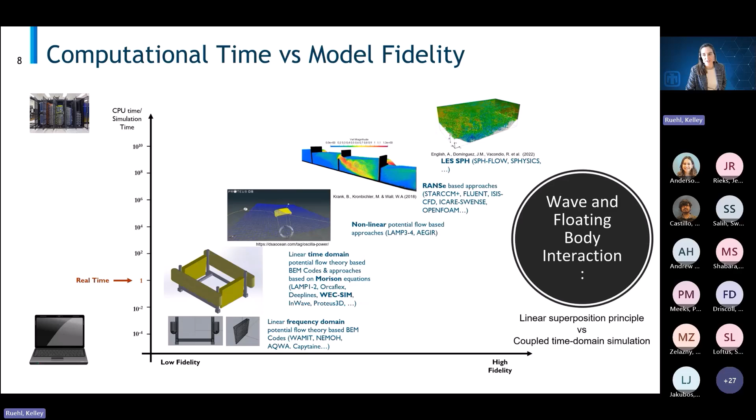So we can run things quickly. You can add some nonlinearities in, and Mohamed will talk a little bit about some of the nonlinear features and how they compare to some higher order models later in the talk.

Okay. Why use WEC-Sim? It simulates the dynamics of devices that are comprised of both rigid and flexible bodies, power takeoff systems, and mooring systems. So each of those components there, bodies, PTOs, moorings, those are actually library blocks that we have within the WEC-Sim software that you can drag and drop into your model.

A really fundamental theoretical understanding of WEC-Sim is that its hydrodynamic coefficients are derived from frequency domain boundary element method solutions. So those are those linear frequency domain models like WAMIT, AQWA, NEMOH, Capytaine. So we take those coefficients and we turn them into their time domain equivalents. But the base assumption is that frequency domain boundary element method hydrodynamic data.

But as I mentioned, we're able to develop the equations of motion of these complex multi-body systems by moving into the time domain and solving those governing equations of motion for each body and constraint and joint in 6 degrees of freedom. So in the bottom, you have a nice little workflow that kind of demonstrates what your process would look like within WECSIM.

So you start with your device specification. That's typically in the form of a 3D CAD model, from SolidWorks or Rhino or ANSYS. There's a lot of ways you can develop that geometry specification. And then you add in the relevant numerical methods, the multi-body dynamics, the hydrodynamics, the PTO, the mooring, and that's

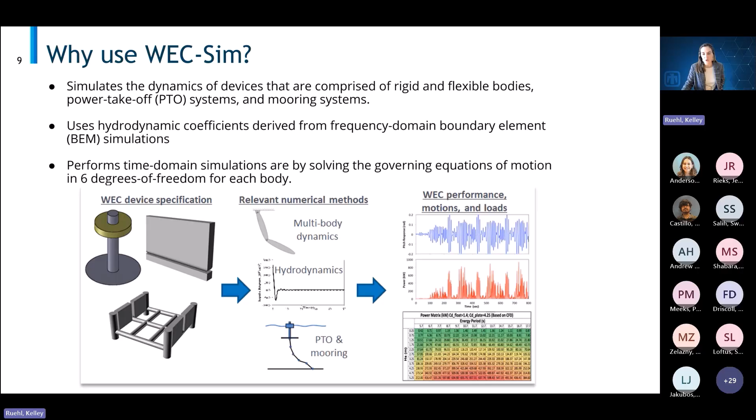So these are some of the applications of WECSIM that I think people may or may not be aware of. On the top left-hand side, we have electric power generation applications. When we were originally scoping WECSIM and thinking about use cases, that was our primary use case. The waves are moving a body in water. That movement is driving a generator of some form and you're producing power. That's the typical use case.

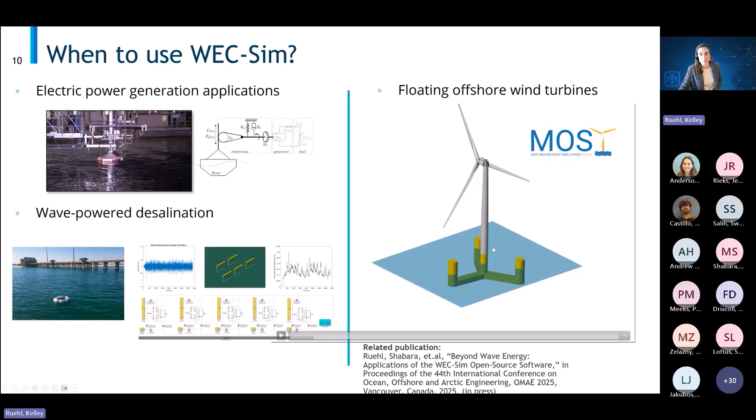But more recently, we've seen applications of WECSIM for wave power desalination and floating offshore wind. And we'll talk a little bit more later on about how WECSIM can be used for floating offshore wind. Additionally, we've seen WECSIM used for wave-powered aquaculture. WECSIM is used to model the floating body dynamics of the wave energy converter, and it's also used to model that aquaculture system. In this case, it's an upwelling pump.

Additionally, it's been used for vessels with crane operations. This bottom left-hand image is a really interesting work from some researchers in Japan, where they've got a vessel, they've got a crane, and they're trying to move things from that vessel onto another vessel or move around in the vessel. And so WECSIM can model those types of complex multi-body systems with floating body dynamics.

Furthermore, on the top right-hand side, you can see an application of WECSIM, again not by us, by an external team, where they used WECSIM to simulate the installation of floating offshore wind towers. So they were simulating these floating platforms that are used to install these large offshore wind farms. And we've also seen applications of WECSIM used to model underwater vehicles.

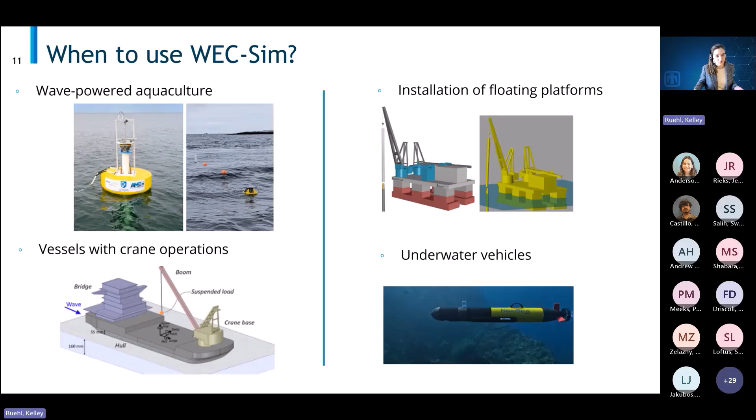In the previous page, I had a citation there. We actually drafted a review paper recently that highlights some of these atypical applications of WECSIM. We call them beyond wave energy.

Okay. In terms of accessing WECSIM, the software requirements are that you need to have pre-processing computer-aided design software. That CAD software is what's going to be used to create your 3D geometry. That 3D geometry is then meshed as a surface mesh, and then it's run in a boundary element method solver. The BEM solvers listed here are the ones currently supported by WECSIM, although that is not an exhaustive list. There are plenty of BEM solvers out there.

Similarly, that same data that we extract from the boundary element method solution could be obtained through CFD or experimentally. We also support those methods. However, our primary workflow is the one highlighted here. To access the WECSIM software itself, we host the software on the GitHub repository. The link here is to where you would actually access the software.

And as I mentioned, we have some required MATLAB toolboxes. We require MATLAB, Simulink, Simscape, and Simscape Multibody. The oldest compatible versions of those toolbox requirements are provided in the table on the right. On occasion, we will upgrade the oldest compatible version, but currently we support the 2020B version of MATLAB.

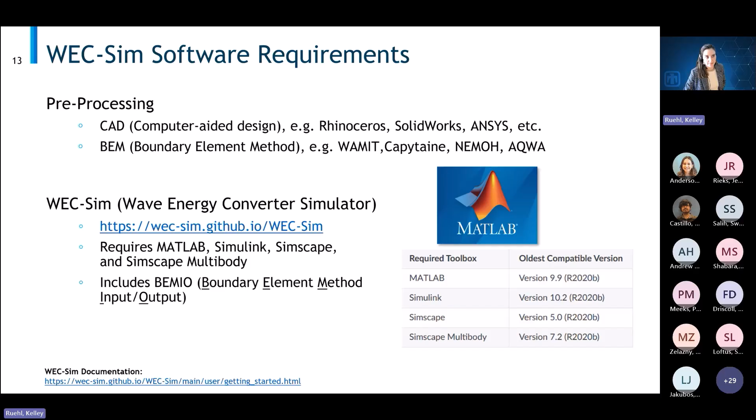So additional optional software requirements. These are applications that we call advanced features, but you could really call them anything. These are ways that once you run a WECSIM model or want to couple a WECSIM model, you can add some complexity. So if you want to create a really nice visualization of your WECSIM model, you want to show the wave surface elevation moving or the pressure glyphs on the surface of the body, things like that.

We have coupled WECSIM with ParaView, so you can use ParaView to create these really nice graphics. We've got some videos of that on our website. You can also couple WECSIM with MoorDyn to have more complex mooring system modeling.

And we'll have a talk on MoorDyn as part of this series. It's May 7th at 12 p.m. Mountain Time. So if you're interested in learning more about MoorDyn and how it can be coupled with some of the software in this series, I highly recommend you attend that. We also have the option of parsing both input and output data for WEC-Sim with MHKiT, and that is also featured in this series, May 21st, 12 p.m. Mountain Time.

In terms of accessing the software, like I mentioned, we have a GitHub repository. We have an organization that's called WEC-Sim. So it's github.com/WEC-Sim. You'll see a collection of repositories in that organization. One of those we call WEC-Sim, which means you go to github.com/WEC-Sim/WEC-Sim. That's our WEC-Sim source code. So that's what you actually need locally to run the software.

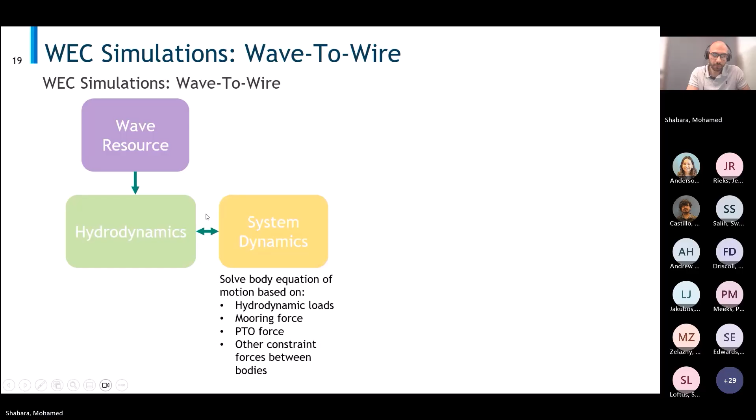WEC-Sim can calculate the hydrodynamic loads, can also account for the effects of the mooring forces on the device, can also do some calculations related to the hydrodynamics. So WEC-Sim kind of goes into these two blocks, the yellow one and the green one, but it's mostly heavily on the yellow one. And then we also need tools that can do some structural dynamics, can compute the fatigue, can do the FE analysis and get the forces on the device components.

And also we need to have tools that can simulate the PTO unit and the flow of power from the device up to the generator in a hydraulic system or electric drive or a turbine. And there's a rich set of toolboxes in MATLAB, and this is something very unique about WEC-Sim because you can pull any MATLAB toolbox that you need and integrate it into WEC-Sim or the Simulink model to get whatever you're looking for. And then you have the power generation and the grid.

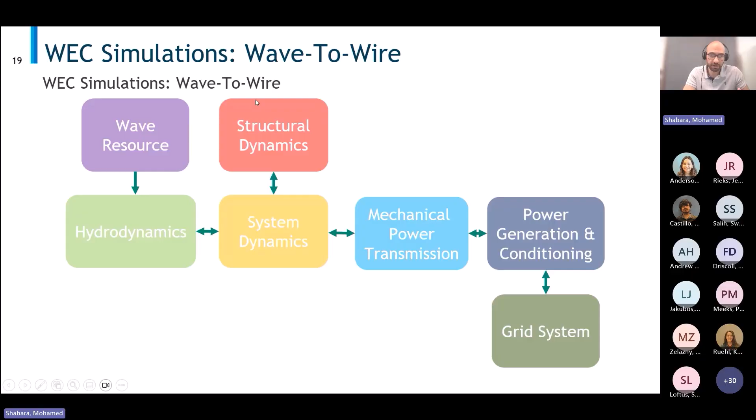So the WEC-Sim goes into here, the hydrodynamics as WEC-Sim, and then also the system dynamics, and also goes into the mechanical power transmission. You can couple it with MHKiT for the wave resource. There is now a MATLAB version of MHKiT, and also there are some MATLAB built-in tools that can do fatigue analysis, FEA analysis, and stuff like that that can be coupled into WEC-Sim, and so on. So this is like a summary of WEC-Sim.

There are plenty of boxes there, and it's pretty distracting. So we will try to go through them one at a time, step by step. In order to use WEC-Sim, you first need to have a CAD, the geometry of your device. And after having the geometry, you need to get a good mesh. This is a pretty time-consuming part. You have to know what a good mesh is and how BEM solvers handle this mesh.

So you pass this mesh to the BEM solver, WAMIT, NEMOH, Capytaine. WEC-Sim also supports development in Capytaine, but we won't be going there in this presentation. So you generate your hydrodynamic results from these BEM codes and pass them to BEMIO, which is also part of the WEC-Sim repository. It's a pretty simple and useful tool. This BEMIO function will generate a standard H5 file, a binary file, that has all the inputs needed in the correct format for WEC-Sim. So you don't really interfere with much of the details there.

You just generate your hydrodynamic results from WAMIT or Capytaine or NEMOH and pass them to BEMIO. BEMIO will generate this standardized format for you. You can also use MoorDyn; the coupling between WEC-Sim and MoorDyn is very simple. We have a team member called Jeff. He did a pretty good job there to make things very easy for the users.

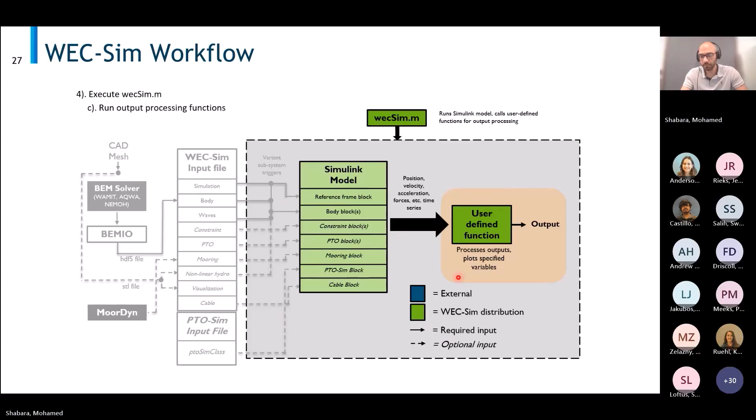After that, you run WEC-Sim. Just write wecSim in the command window and press enter, and this will automatically trigger a sequence in the background. This sequence will start by reading the input file, and then take this input file and try to match it with the Simulink model that you made. If they don't match, it'll give you an error, and then it will automatically start doing some post-processing depending on the variables or functions that the user defined. So if you want to look at the power output of the device, or a certain force or the trajectory, velocities, accelerations, this will also be done automatically, and you will get the outputs that the user requires. So I kind of went through it real quick.

I'll open WEC-Sim in a second and show you an example case. The example case that I will show is the RM3. The RM3 is just a two-body problem: one body that's allowed to move in three degrees of freedom, and the other one that's allowed to move in heave-only motion with respect to this body here. And as I said, the first step in the WEC-Sim part, after getting BEMIO and all these things, is to build the Simulink model.

As you can see here, we have two bodies. Just drag and drop. Go to the menu here, go to bodies, drag and drop two bodies, and then you have a translational connection between these two bodies. You drag and drop another block for the spar with the global reference frame, which is here. And then start connecting stuff together.

I will swap now to the WEC-Sim itself. So when you download WEC-Sim from the GitHub repository, you will have these folders. In order to be able to run WEC-Sim and couple it to your MATLAB, you just need to open this, add the WEC-Sim path, and run this function. Pretty straightforward. The thing is that every time you open MATLAB, you will need to rerun this.

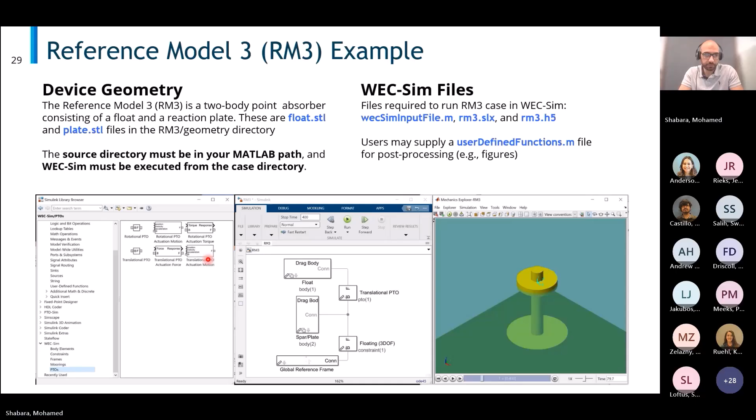So here we have two bodies, the geometry for each one of these bodies, and then we have the hydro data. It has the .out file from WAMIT, and we already ran BEMIO, so we have the H5 file right there. So once we have these two things in place, the H5 file and the geometry, we can go ahead and open the WEC-Sim input file itself. So if you go here to examples, RM3, and go to the WEC-Sim input file.

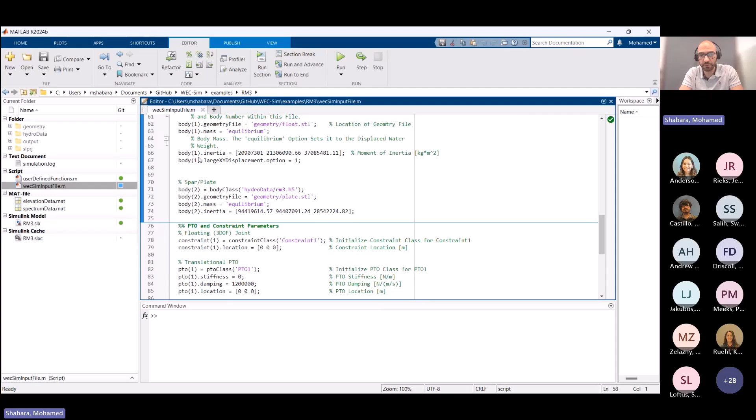So these are the inputs that you need to define. There are some inputs related to the simulation, some inputs related to the waves, some inputs related to the bodies that you have, and then the constraints and the power take-off unit. For most of the simulations, you won't need more than that. Let's go take a look at the Simulink. So before going into the WEC-Sim input file, you go to the Simulink.

You have here the WEC-Sim library. You have body elements, cables, constraints, frames, moorings, and so on. The most used one would be, of course, the body elements. We have flexible bodies and rigid bodies, and we will go into the flexible bodies later in this presentation. So you just drag and drop like this, as simple as that. And then you start connecting stuff. So it makes building a WEC pretty simple.

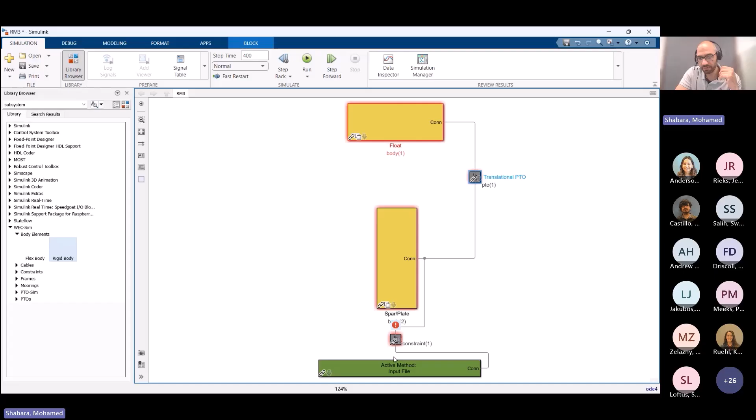So in this case, we have two bodies, the float and the spar. And then we have a PTO connecting them together, and it's translational because this is going in a heave motion with respect to the spar. And then we have the global reference frame, the inertial reference frame, and this is also connected to the spar. Once we have these in place, we can go to the WEC-Sim input file and compare both of these together. I usually have them open side by side.

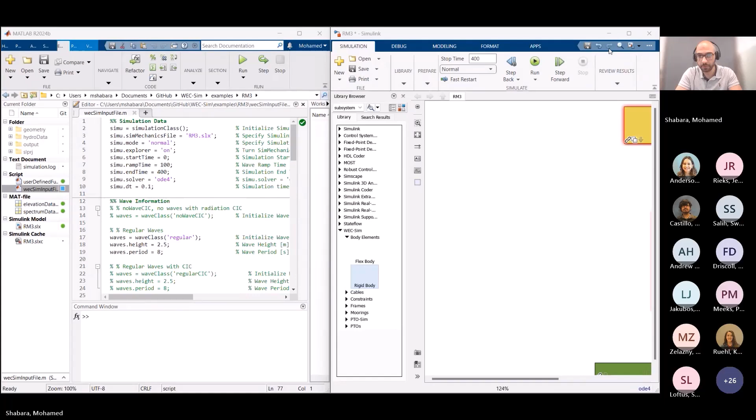So you just define the simulation object. The first one is just the name of your Simulink file. It's called RM3. So this is the name here. And then you can turn on the visualization, simulation time, the integrator, ode45, ode4, and the time step that you require. You define the waves that you need.

The interesting thing about these examples is that it also shows every other input you can use with waves. So if I'm running another simulation and I don't want to reinvent the wheel, I just open these and copy and paste these lines from this simulation to somewhere else, and then modify the methods or the inputs here depending on my own model.

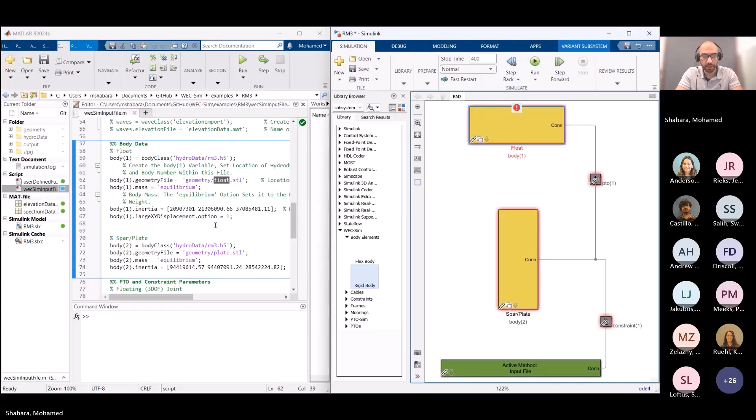And then you go to the body. We have two bodies. Body one here is the float, which is this one here. You can see it is named body one here, and also it's called body one here, to make sure that these two instances from the body class are connected together. And the same thing for the spar. You also link the geometry from the STL file that I just showed. You define inertia, and so on.

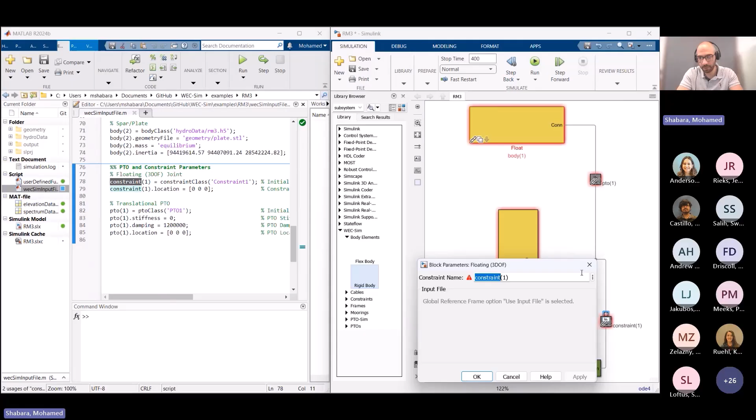There are plenty of inputs. If you right click and open the body class, you'll find multiple inputs that you can go through and explore at your own pace. And then we have the constraint block. If you double click here, you'll find constraint one. This is linked together here. And also the power take-off class. These two are also connected.

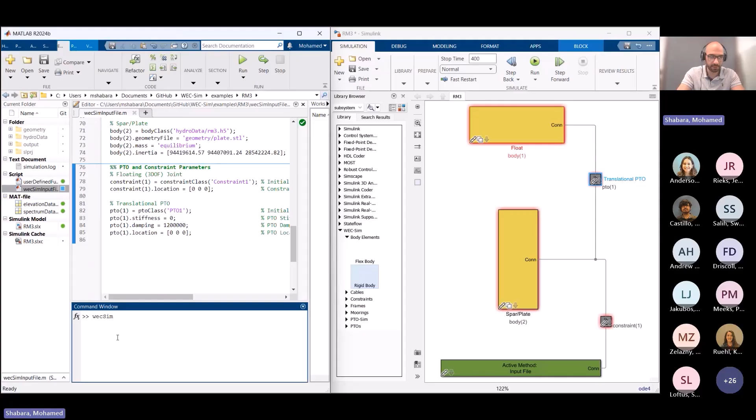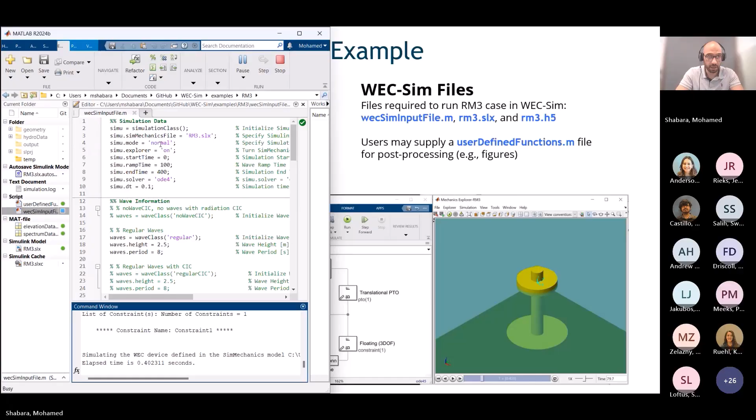So in order to run this, you just make sure that you are in the correct directory that has the WEC input file and has the Simulink model, and then you write WEC-Sim. Use camel case for this. Then press enter. It will take slightly longer because I'm enabling the visualization, which is enabled by having Explorer on and off here. And voila, you can get a visualization of the model that you have.

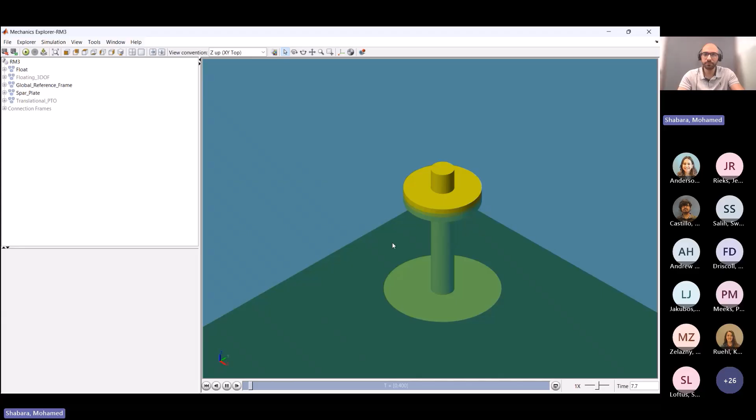Usually when I'm running the model the first couple of times, I will have the visualization on to make sure that the bodies are behaving as expected. Once I'm sure that they are connected correctly and related to each other, I start disabling this visualization and do my own thing, unless I want to do a presentation or something, so I can just save this as a video. And these are the inputs that we have.

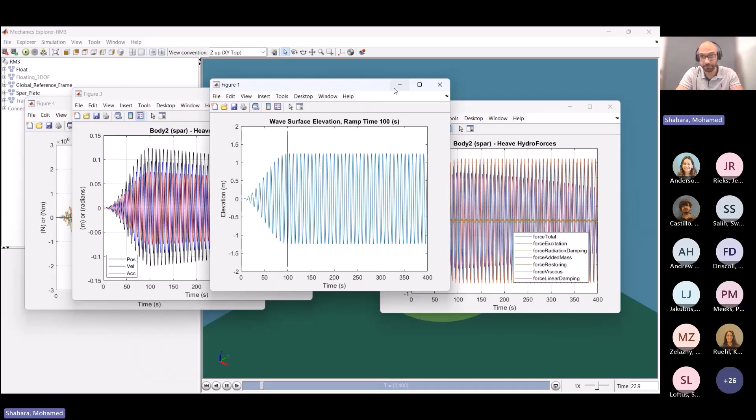It's a regular wave, but in this simulation, I'm enabling the XY large motion. So this RM3 will be drifting in the X and Y motion. That's why you're having this tapered shape.

So with this, we can go to the next part of the presentation, the WEC-Sim applications. We will go through some of the applications we have, like 5 applications or some of the advanced features. The first one would be the nonlinear hydrodynamics. This feature alone makes WEC-Sim a mid-fidelity solver because it can go from linear wave theory to nonlinear hydrodynamics. And also, we will pass through the QTFs. It's a newly added feature; we're still working on the documentation for this. The quadratic transfer function is basically the second order forces.

So to enable the nonlinear hydrodynamics, you need 2 things. The first thing is a fine mesh. You have the STL file; it has to be ASCII format, not binary format. And you need to have a good mesh. A good mesh means that it has to be fine enough, the aspect ratio is not too small, and the skewness level is below 0.25. And then the second thing is to modify the instance of the body to include this feature, whether nonlinearHydro equals 1 or equals 2.

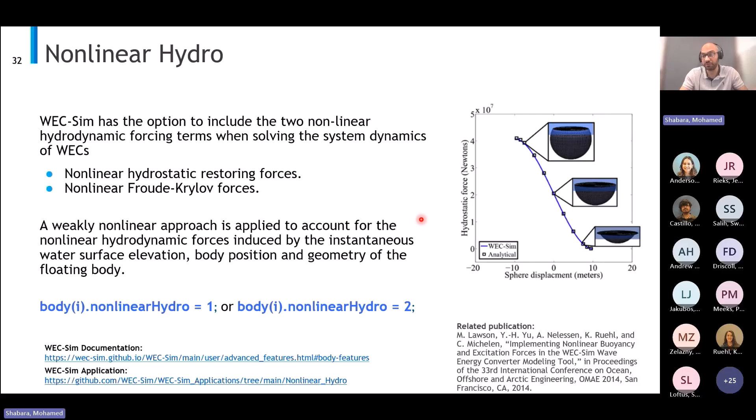For the second order excitation forces, or the QTFs, this is important for large structures. Large structures can be offshore platforms or rigs, floating offshore wind turbines, or ships as well, because there are some papers out there that use WEC-Sim to simulate ships, and all sorts of other structures affected by drift forces and second order forces. Basically the QTFs account for the interaction of waves together. So if you have omega 1 and omega 2, 2 frequencies in the same wave interacting, this feature will capture it and calculate the excitation forces based on it.

And basically it's enabled by setting body.qtfs equals to 1, as simple as that. In the next month, we will be allowing some other methods for the calculation of the QTFs, the Newman approximation, the Stanley approximation, but the currently implemented one is the most accurate one. We will just include other things to make sure that we satisfy all the users' needs. But with QTFs equals to 1, this will enable the most accurate, the most state-of-the-art method for calculating it right now.

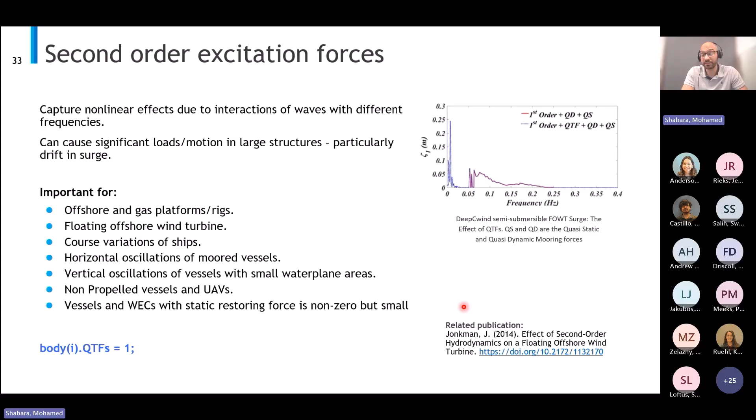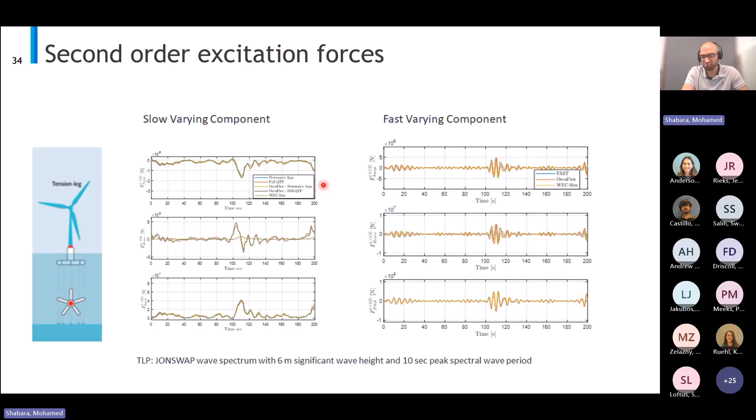The other advanced feature that we'll pass on now is how to simulate a flexible body. If you have a body that is behaving like this, it doesn't have a fixed shape. It's just hyperelastic material. So you can simulate these devices with the assumption that you don't have very large deformations. There are some features that can do large deformation that were implemented recently, which is variable hydro, but we won't be covering it now.

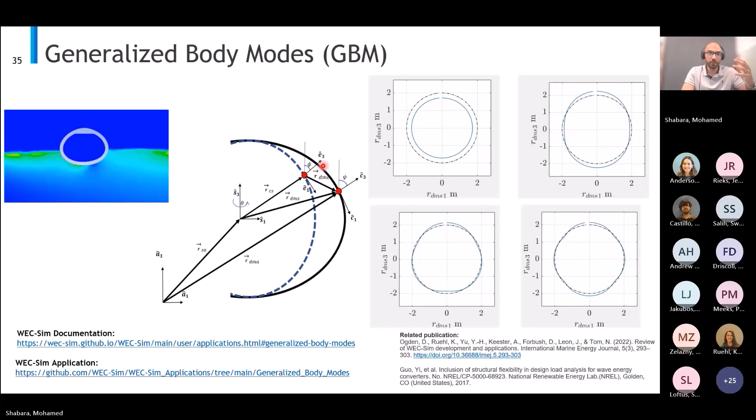The recommended one is using the generalized body modes, where you assume that the water surface here has mode shapes. It can be a heaving mode shape, it can be a sloshing mode shape, whatever is relevant to your case. And WEC-Sim can simulate both of them, plus also the free surface pressure method, which is a WAMIT unique feature. It can also handle this kind of modeling for a single water column.

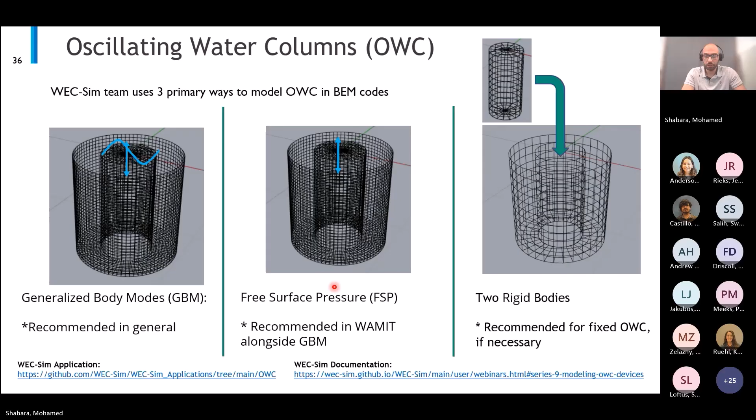So Kelley will jump in now to go through the PTO and PTO-Sim and the Simscape toolboxes. All right. Thank you so much, Mohamed.

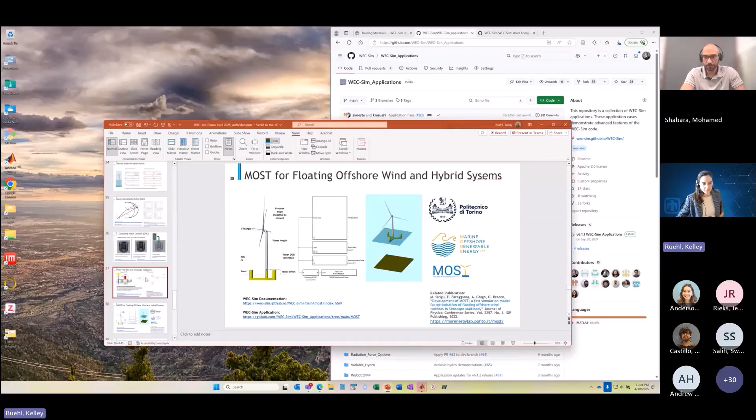All right. Can everyone see my screen? Not letting me present. Give me a second. There we go. All right. Can everyone see my screen? I'm going to assume that's a yes.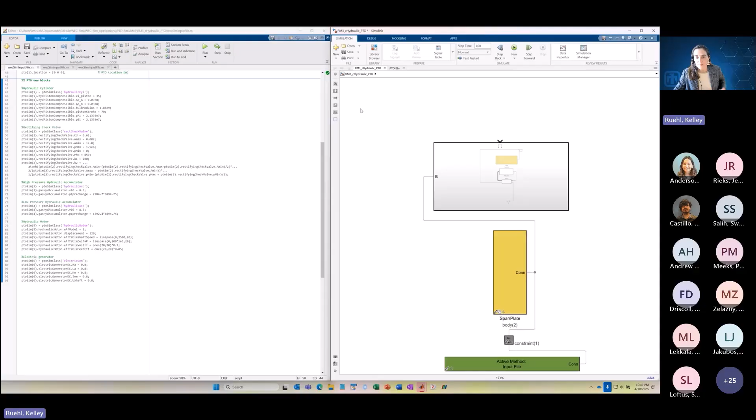So the right-hand side is the Simulink model of the reference model 3, exact same case that Mohammed went through in his example, but instead of just applying a linear damping coefficient between the float and the spar to have a linear model of your PTO, you can actually go into this PTO system subsystem and you can see that we're actually modeling the component level of this hydraulic power takeoff system.

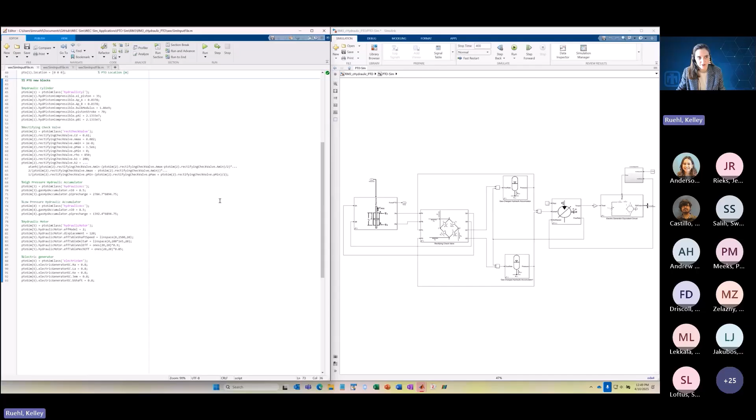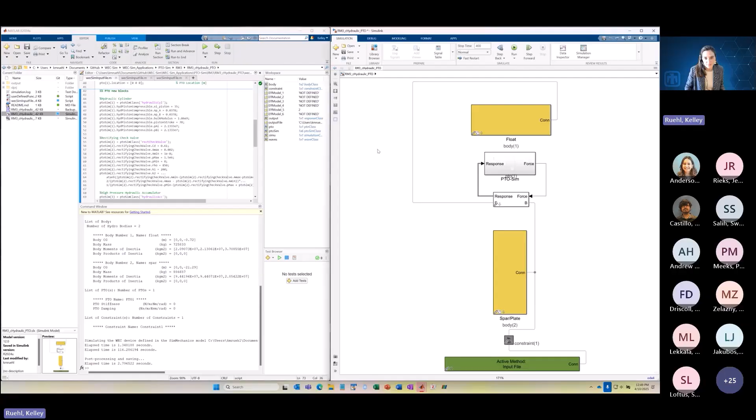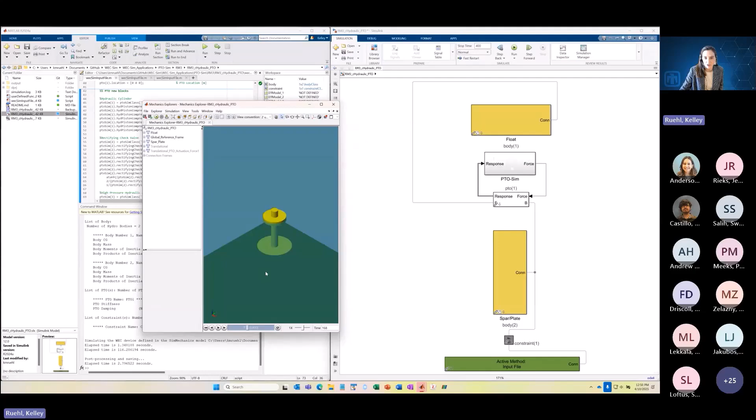Furthermore, once you have modeled the component level of the power takeoff system, you can actually start to implement real-time control and advanced control algorithms. So WEC-Sim allows you to model those complex PTO systems and also implement control in them. So also like Mohammed showed you, you can visualize the simulation, we can change the way that we're viewing this, like the aspect ratio. Sorry, I'm doing a terrible job moving this around real time. But you can watch the body float move in response to those waves.

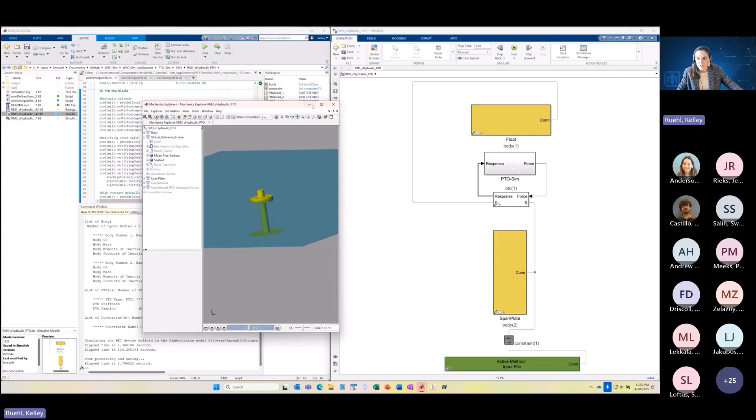And the other thing that you get as a result of that is you can extract data at each of those component levels of the PTO model at each time step. So this first figure, we're looking at the pressure in each of the high and low pressure accumulators. In figure 2, we're looking at the PTO force, which is the forcing on that PTO system. Figure 3 is showing the motor or generator speed. And then figure 4 is showing the pressure differential on the hydraulic motor and then the hydraulic motor flow rate.

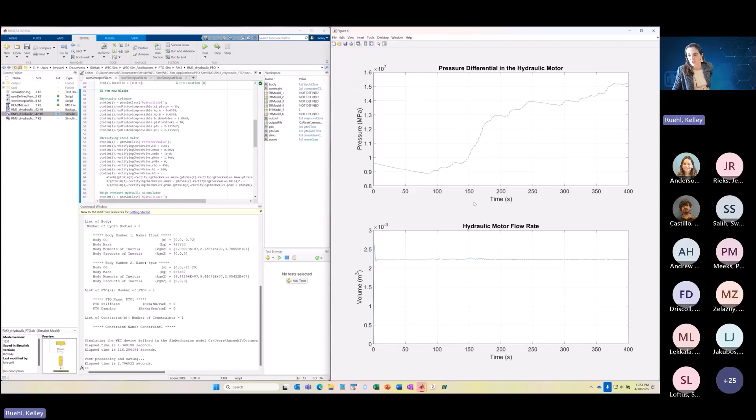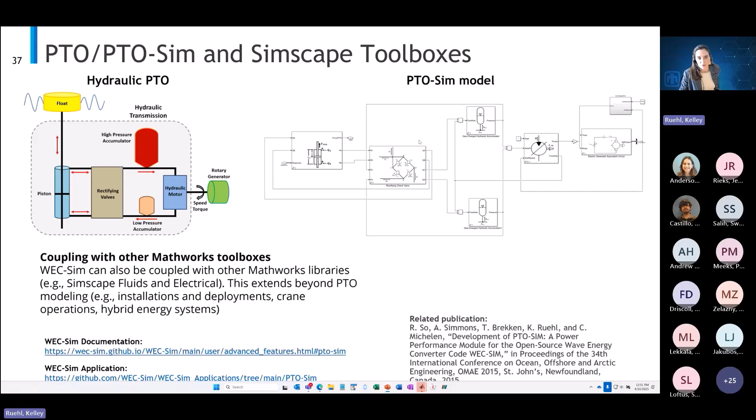So these are just some examples of things that you can get on the output of a PTO Sim model, which is a somewhat unique capability within this space as compared to some of the other tools that were commercially available at the time when we developed WEC-Sim. And like I said, those are just some of the bespoke WEC-Sim models. You can do more once you move to implement some of the MATLAB toolboxes.

So MOST is the next application I want to highlight. As I mentioned, WEC-Sim was originally developed to model wave energy converters. That's our scope. We're funded by the Water Power Technologies Office. But there's a lot of examples in the literature of people applying WEC-Sim for other applications, including offshore wind, floating offshore wind, and hybrid energy systems.

So we were fortunate enough to have people from the MORE Energy Lab in Italy who built upon WEC-Sim and created a toolbox that they called MOST, which is a set of library components, a wind turbine library, a wind class, building blocks to model offshore wind systems in WEC-Sim, and they built that on top of WEC-Sim. So they reached out to us and they said, hey, we'd really like to include that in the WEC-Sim source.

We have it independently released, but we'd really like to work with you and build this capability. And we said, okay, that's great. With WPTO's blessing, we were able to collaborate with them, and they essentially maintain the wind side of this library, and we focus on the hydrodynamics. So I've also pre-run this case

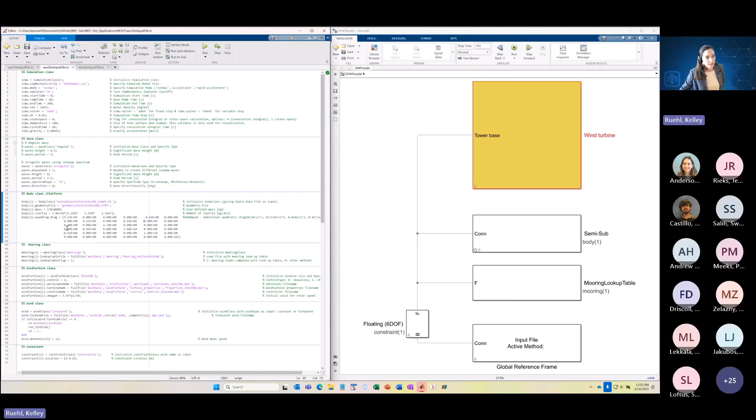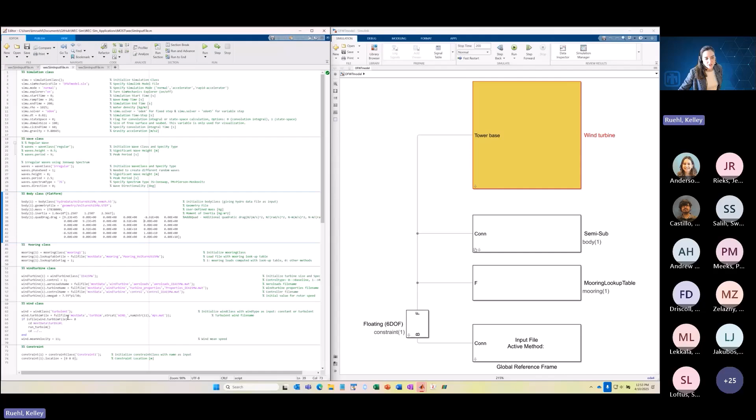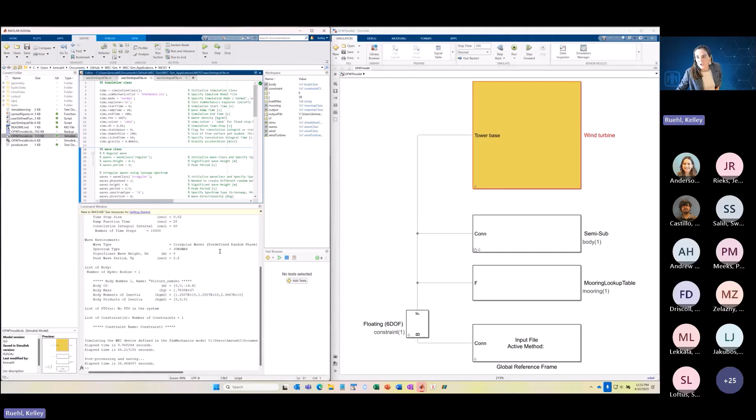here. So on the left-hand side, you can see the input file for the MOST example, and everything to about line 50 is all baseline WEC-SIM. Nothing special here: simulation class, wave class, body class, mooring. But lines 51 to 70, those are the wind turbine specific class parameters and the wind class parameters, which are defining the input conditions and the wind turbine system.

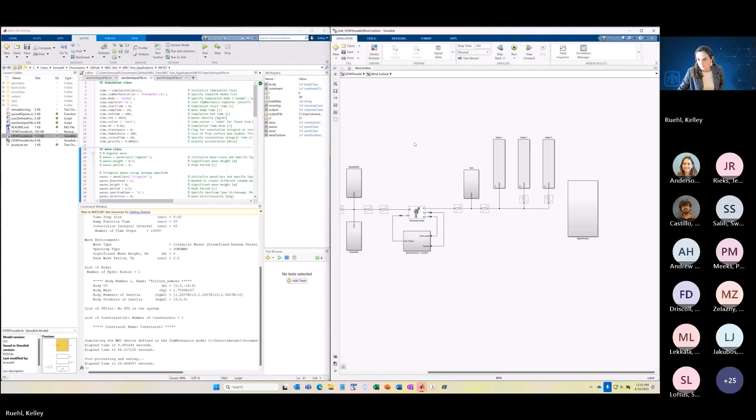So just like I showed you under the building block of the PTO-SIM model, if I go into this wind turbine block model on the subsystem level, you'll see, and I'll make this really big, this is our wind turbine model. So you've got a tower, the nacelle, your rotor, a hub, and the 3 blades. So obviously, the way that this is constructed, it's assuming that you have a 3-bladed horizontal axis wind turbine.

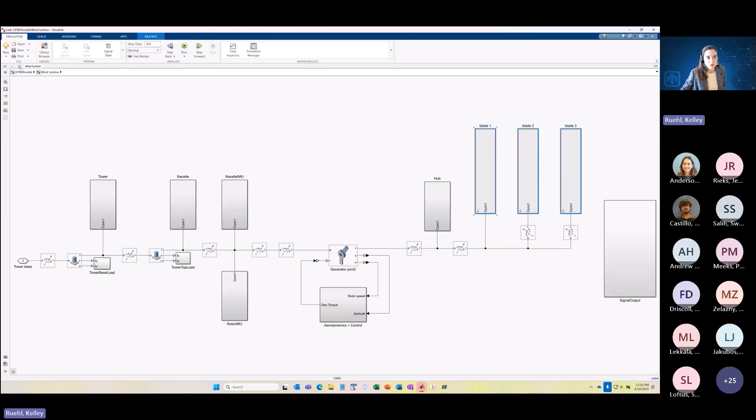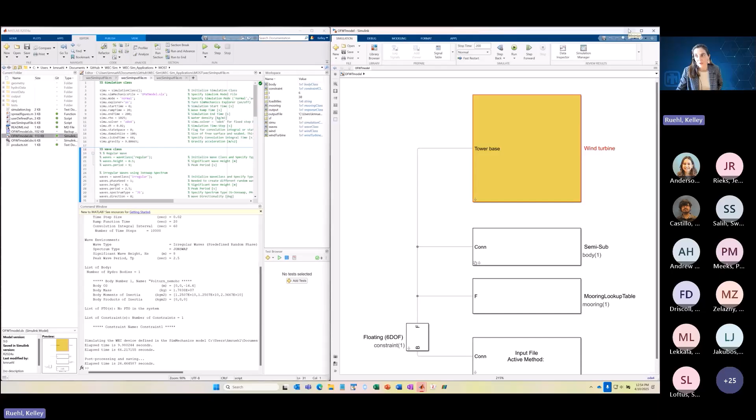However, this could be modified. It could be amended to have different archetypes. Again, that's not our purview. That's the MOST team's development space, but we work with them to ensure that whatever updates they do on the MOST side get incorporated into the WEC-SIM source. And we're actually working on a publication with them right now that compares the MOST implementation with some other solvers for floating offshore wind applications.

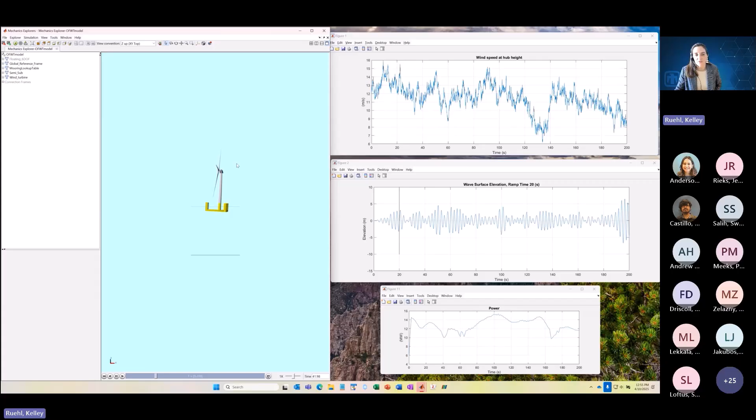So I also just wanted to show kind of what this simulation looks like. We saw a video of it in the screen. Obviously, it's running a lot faster than real time, 64x. Here, I can slow it down. There we go. Here's 1x. So you can start to see how the floating offshore wind turbine, not only how the rotor responds, but you'll see if you really pay attention in here that the platform is also moving in this case.

So the input parameters for that is, we've got the wind speed at the hub height as an input that's driving the rotor. We also have a wave surface elevation, and while you can't see it in the SimScape Explorer view here, you need to recognize that this platform is actually being subjected to waves. And then another thing that you get out is the power that's actually produced by the wind turbine.

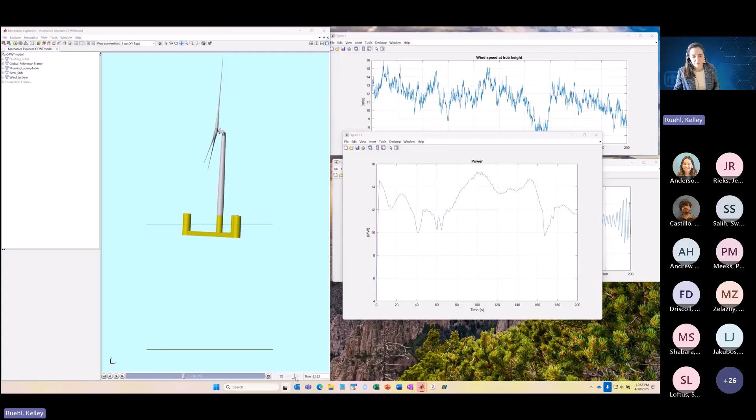So that's kind of an atypical use case, I'd say, beyond the wave energy use case of WEC-SIM, that we've supported. But again, we're not the specific feature owners for that capability. That is actually the MOREnergy Lab.

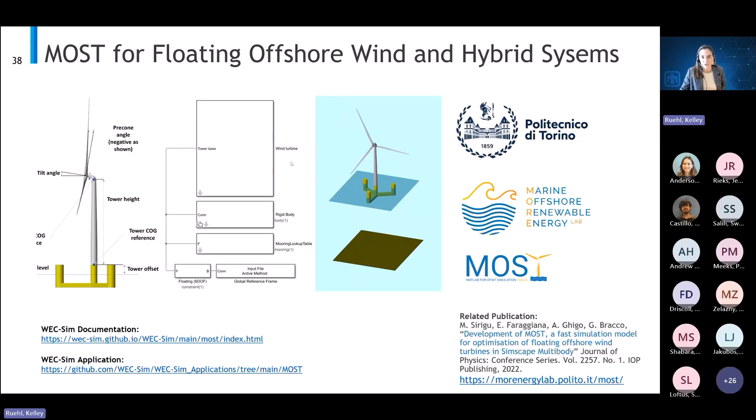Okay, and then lastly, I know we're a little over time, but that's why it was a notional schedule. Last thing I want to talk about: every single thing that we've talked about, those are capabilities within WEC-SIM. Those are ways that you can apply the software. But the thing we haven't talked about is, let's say you want to run a bunch of cases, whether it is one specific model that you want to run for a variety of different sea states or damping coefficients, or let's say you want to do a design space exploration study and you want to study a bunch of different shapes or a bunch of different configurations.

You need to be able to set up batch runs to do that, right? You don't want to have a human in the loop running every single one of those cases. And ideally, you also don't want to be doing it on your laptop, right? You want to do that on an HPC machine. So we have two different ways of doing that, both in series and in parallel. WEC-SIM MCR is the command that executes what we call the multiple condition run of WEC-SIM, which is the version of WEC-SIM that runs in series.

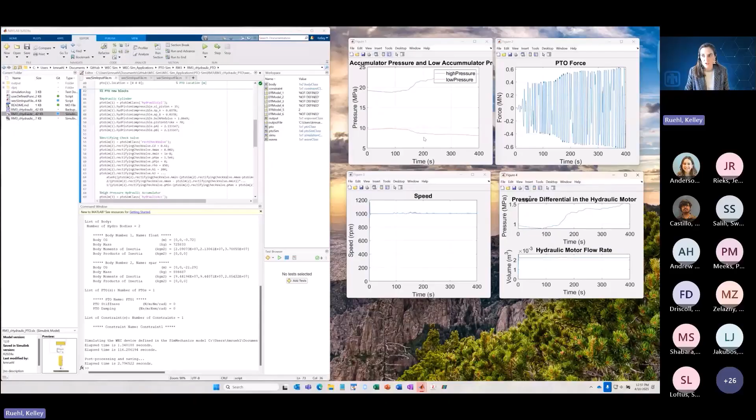There are three different ways that can be specified. Option one is by specifying a range of parameters in your input file. So I've also got this case pre-run. Here is an input file that does that. Do you see lines 15 and 16 here, where we've got the wave height, where we're going from 1.5 to 2.5 meter waves by an increment of 1, and we're running wave periods of 6 to 8 seconds by an increment of 2.

You can also iterate through your PTO damping. So here's another instance on here, line 39, going through a range of damping coefficients. And so what that does is it allows a user to just type one command, which is that WEC-SIM MCR, and it will actually go through a batch run of each of those cases.

So if I scroll through this command window, you'll see executing WECSIM. It's creating a case directory, WECSIM MCR case 1, and it's running through each of those parameters all the way until we get to WECSIM MCR case 8, and then it saves each of those cases' output files in your case directory. So each one of these .mat files corresponds to each of the different cases.

So that's option one. Option two is basically the same thing, except instead of having your sweep of parameters defined in the input file, they're actually defined in an XLS file. And then option three is the one personally that I utilize the most, which is the one where you are actually specifying the MCR cases in a workspace variable.

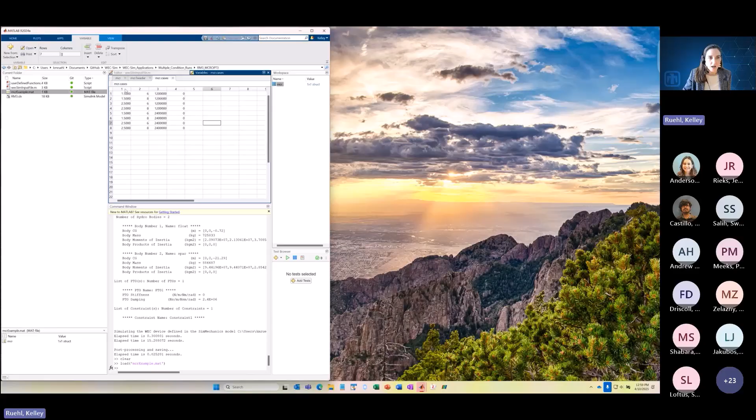So here you've got a header that specifies the variables that you want to change. In this case, it's wave period, wave height, PTO damping, and PTO stiffness. And then you have the values which specify those parameters. In this case, we're actually not changing stiffness, but you can see the wave height, the period, and then the damping coefficient. So these are the exact same cases run 3 different ways using WECSIM MCR. Again, the way you execute that is just typing WECSIM MCR in the command window.

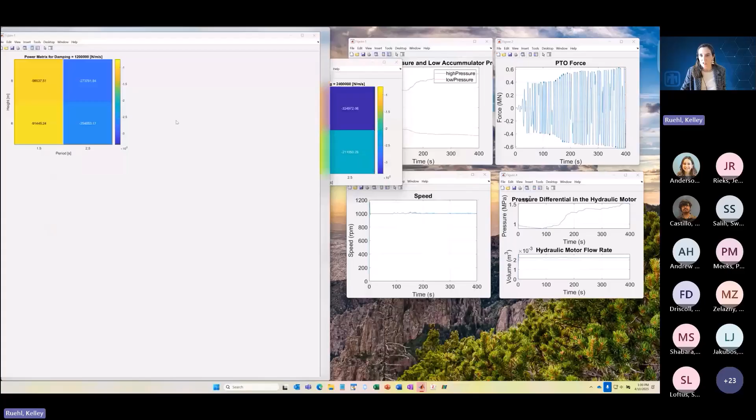And then in terms of outputs, I think they actually were on my first screen, unfortunately. You can get, here we go, some power matrices. Here's some example power matrices. So in this case, we're looking at just those 8 cases, those 2 periods, 1.5 second period, 2.5 second period, and a wave height of 6 and 8 respectively for the 2 different damping values. So you can start to populate power matrices for this.

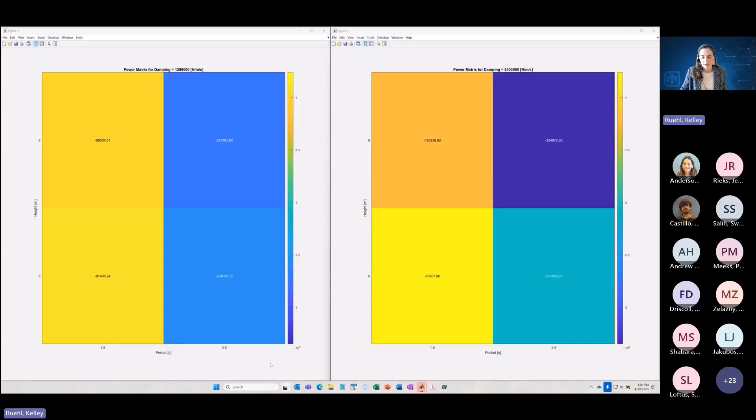Again, I didn't run this real time right now, just in the interest of time, but these cases do run pretty quickly. If you're not happy with how long it's taking, you can also use WECSIM PCT. It's the exact same setup, those same 3 options, but instead of running those cases in series, it actually runs them in parallel. The caveat being that you have to purchase an additional toolbox. It's the MATLAB Parallel Computing Toolbox.

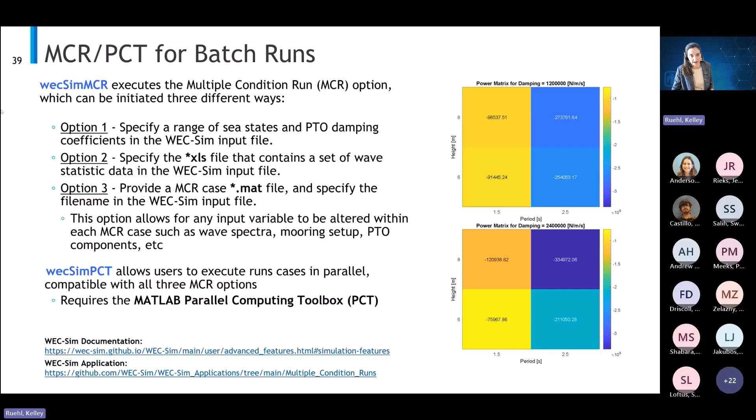This is the reason that we support both. We're really mindful about the fact that WECSIM does rely on these paid packages, and we try to minimize the amount of package requirements for our users. So if there's a way to do something without adding additional cost to the users, we try to do that, or at least support it.